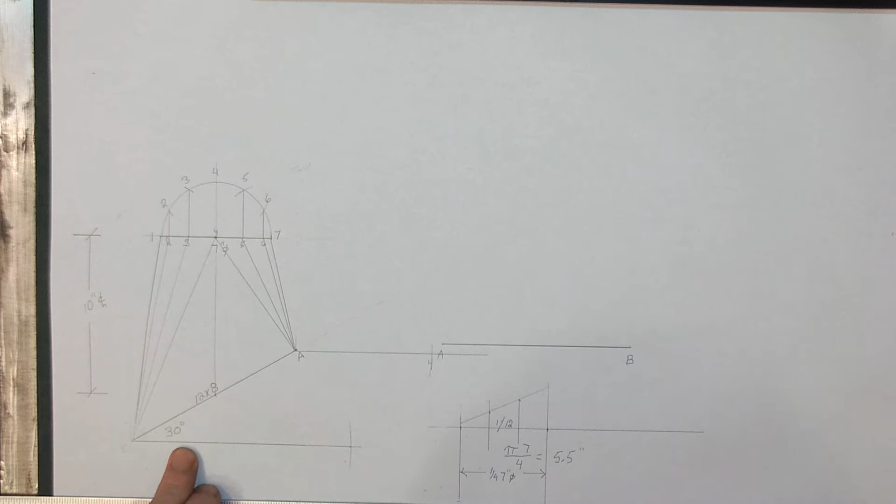Good day. I am the Draft Doctor, and in this lesson I am laying out a pitched square to round. This pitched square to round has a 30-degree angle on it. It's 12 by 8 at the rectangular end and 7-inch round at the top.

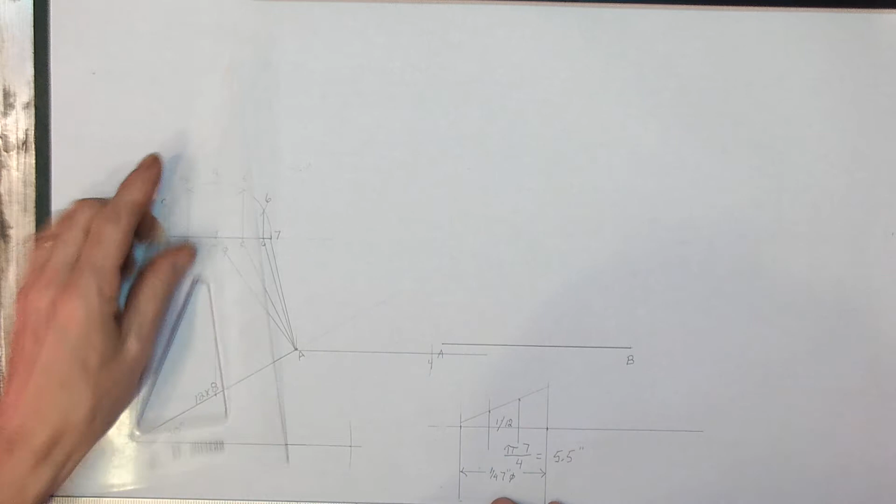Now, I've gone ahead and made my elevation view. I've put my profile on the top. I've divided it into equal spaces and I've numbered them. Now, in order for me to get some lengths that I can triangulate with, what I need to do is project this up into plan view as well. So if I just bring that up like that, and I'm going to bring this corner up like this. This is what we see in the plan view.

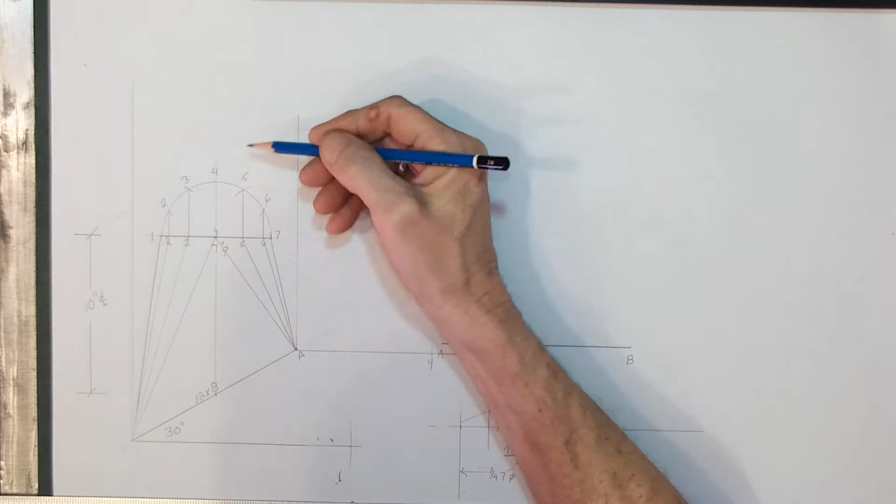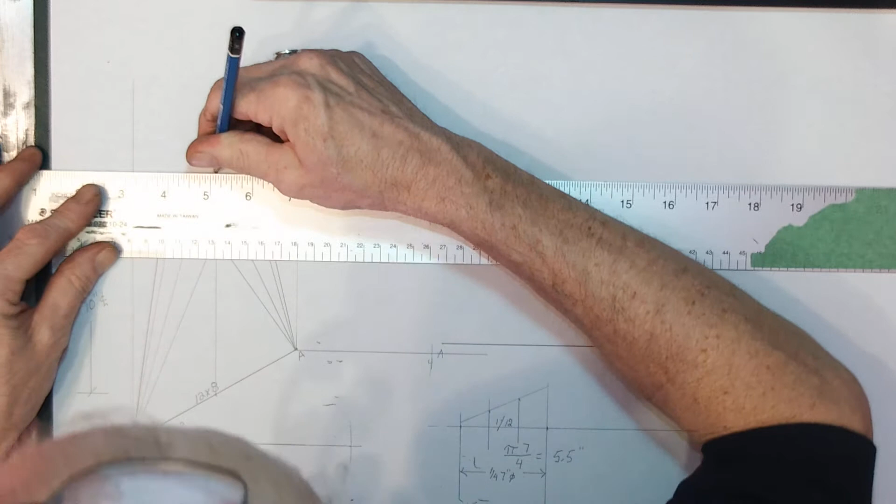I know it's not the same length as the 12, but we're not going to worry about that right now. And if this is 8 inches and this is my center line, then I would have to come up 4 inches to that edge. And I'll have this profile and we'll be using it as part of our plan view. So now on my 3/8 scale, I need to go up 4 inches, and that right there is now a half plan view.

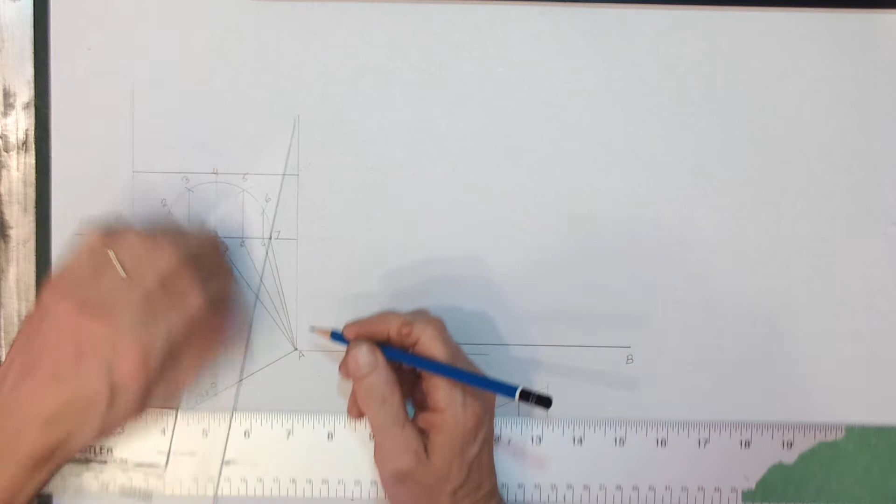This would be my seam. This would be my seam. And let's just mark this in here. Well, I've kind of connected my views together. And there's a reason for all this. Here. Now, if I look at that, there is a half view of my fitting.

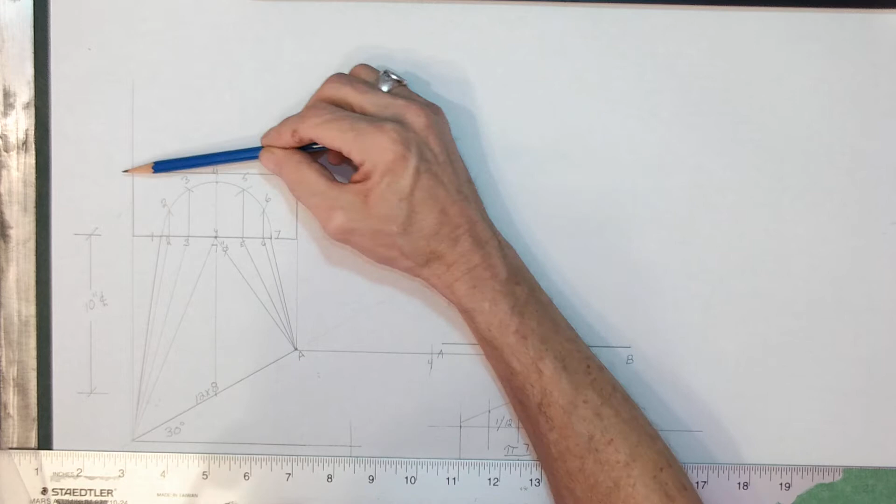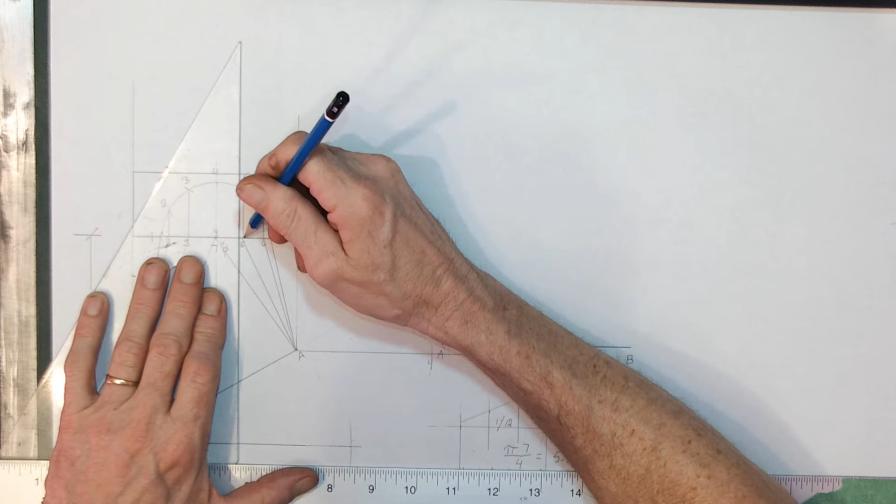Now, in order for me to triangulate these lengths, I have to triangulate over the difference in the falls from center line. Now let's take an example of number 4. 4 is falling from center line half of the diameter, and its relationship to A and B is the fall of the difference right here. So in order for me to triangulate that, here's a little trick that I like to use. What I'm going to do is just extend these up to the edge of my base, my 12-inch side that I'm seeing in the plan view here.

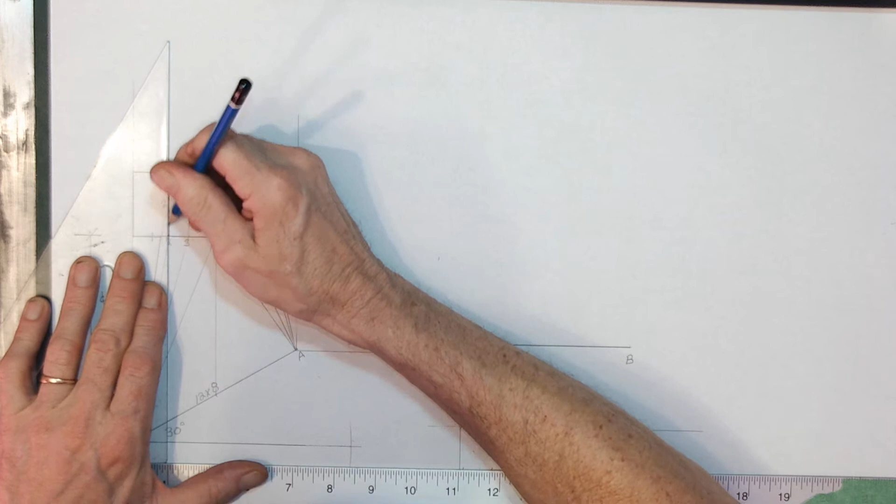And in essence, what this is going to accomplish is it is going to give me 7 true-length triangles with the fall already incorporated into them. When it comes to triangulation, we are always looking for true-length triangles that can be utilized. So I'm just going to extend that now, probably into my pattern, but that's okay. And we're ready to start.

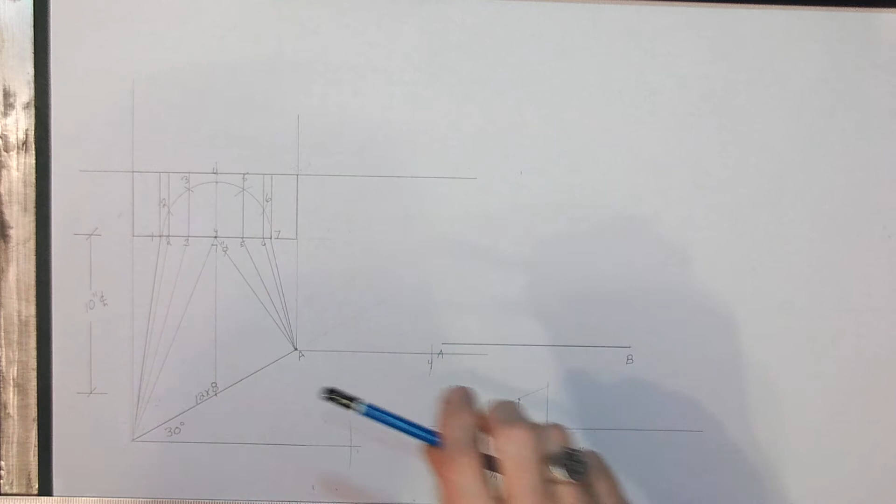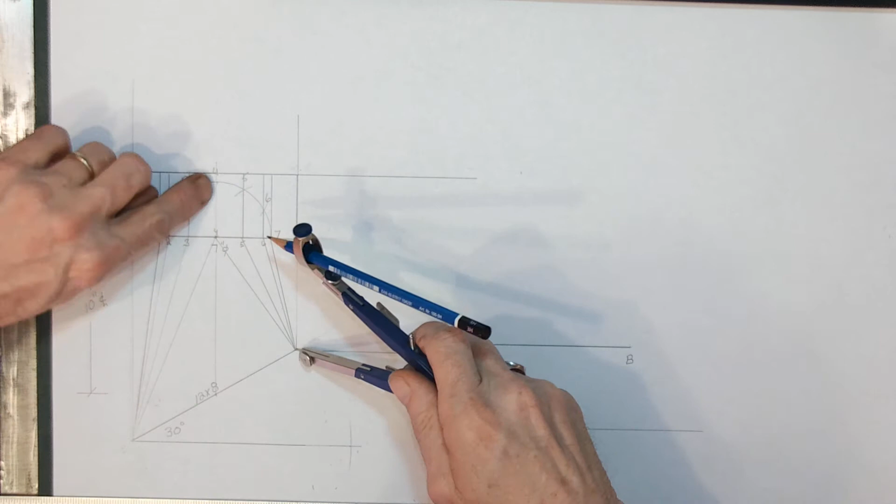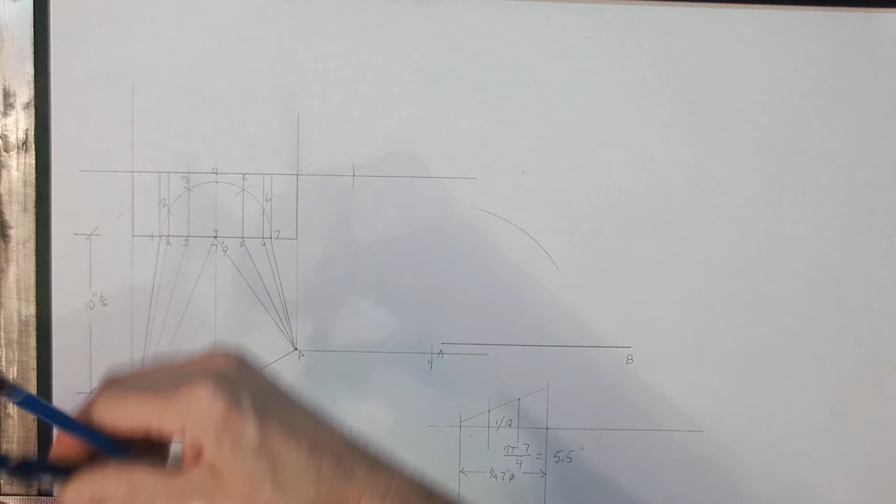I've laid out AB. I flip-flopped them from BA so that I would get a nice inside pattern. Here is the length of my A to 4. Now, if I use the fall of 4 and I take this and mark it from 4, I have a true length triangle for that particular fall. And now I'm just going to take the true length of that, and from A, somewhere on this arc, will be point 4. Where on that arc? Well, we're going to find that out when we triangulate B4.

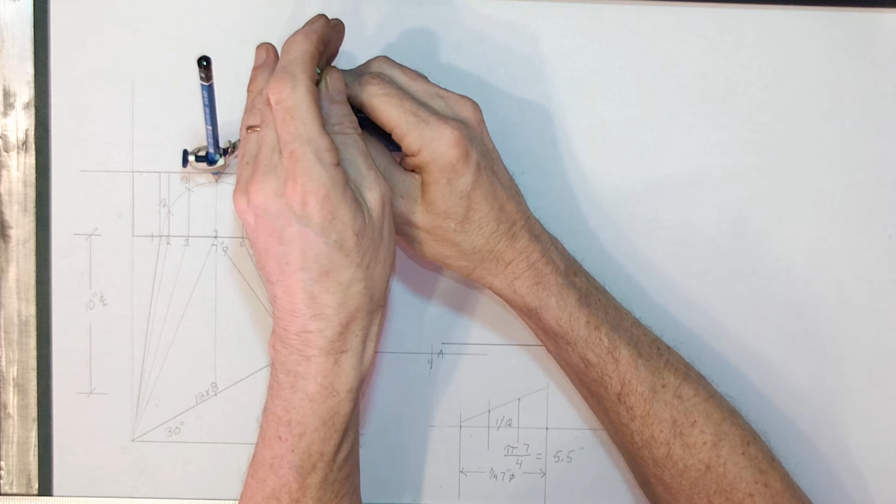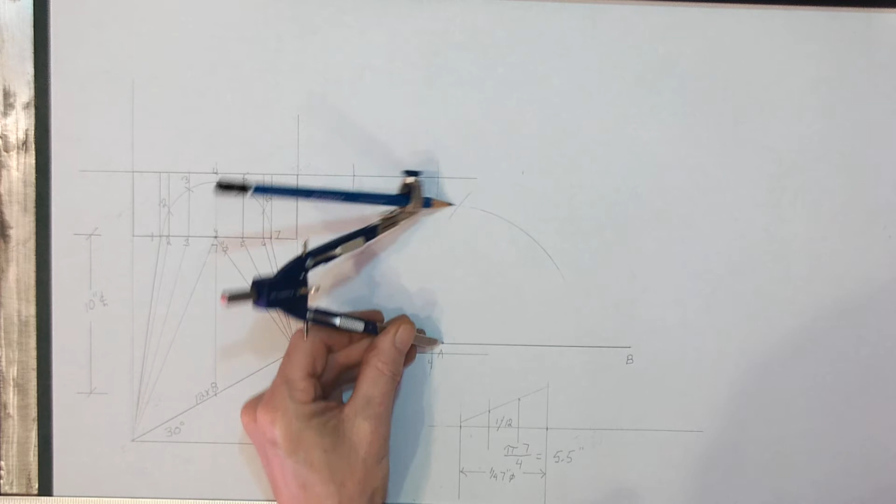There's our plan length of B4. Now I'm using the fall of 4 to the edge. There's my plan length. My true length is the hypotenuse to this point here on the round. And there we have it. And from B, I find point 4. Try to make that first arc kind of big because I never know where it's going to intersect with these kind of fittings. So obviously I didn't get it in the right spot. And now I have. There's my 4 point.

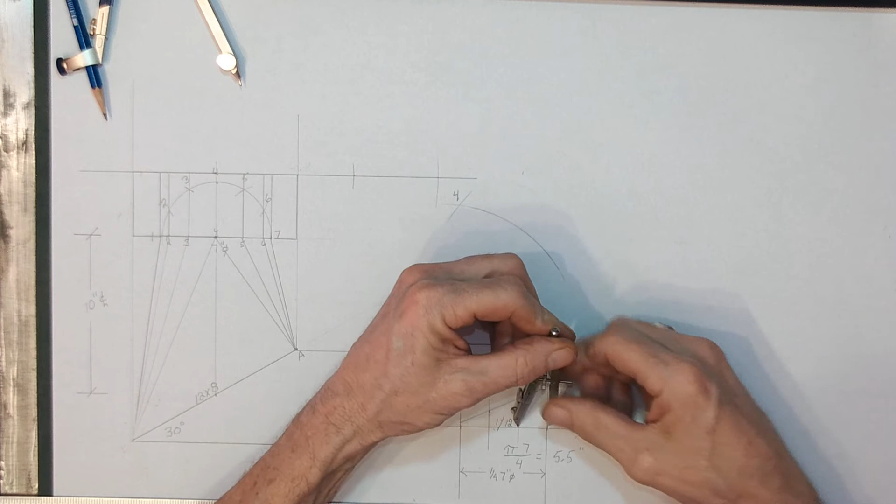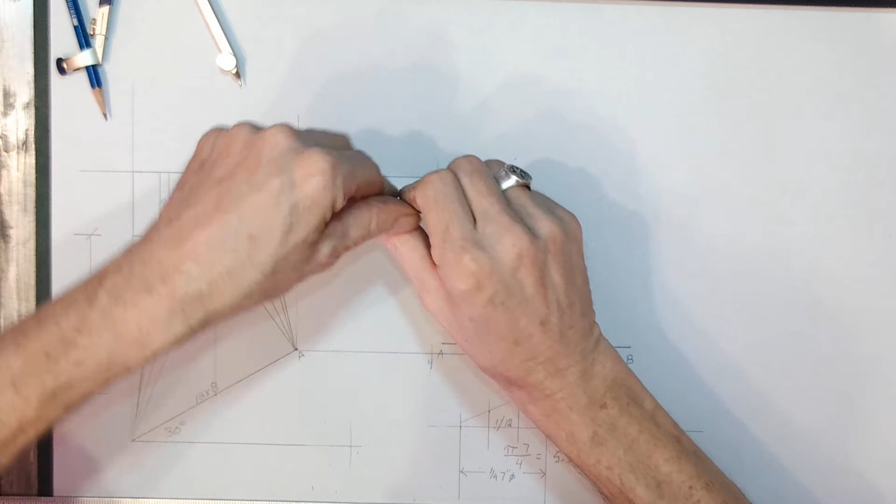From the 4 point, I need to make a relationship to the 3 and the 5, and to do that, I've taken 1/4 of my circumference. I've physically divided it into 3 spaces to get a 1/12 of my circumference, and I set my dividers up for that. And from point 4, somewhere on this arc is point 5. Somewhere on this arc is point 3. Pardon me. Now, let's find point 5 next. Here's our plan length of point 5.

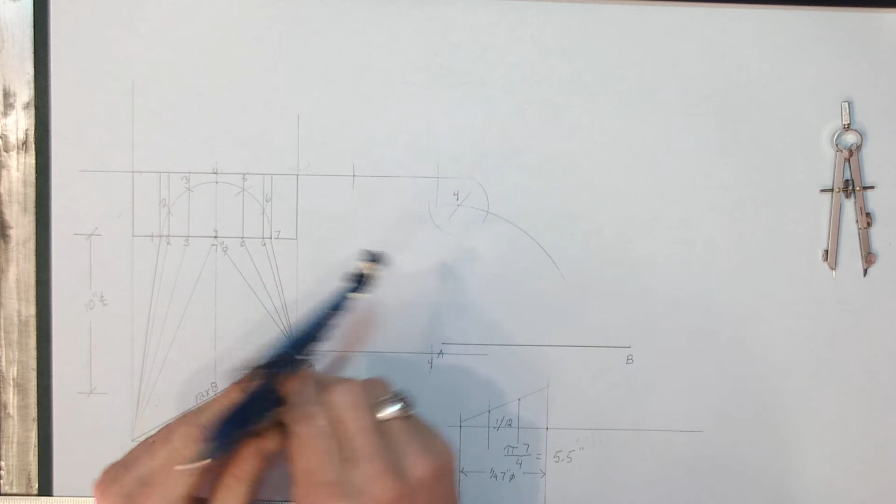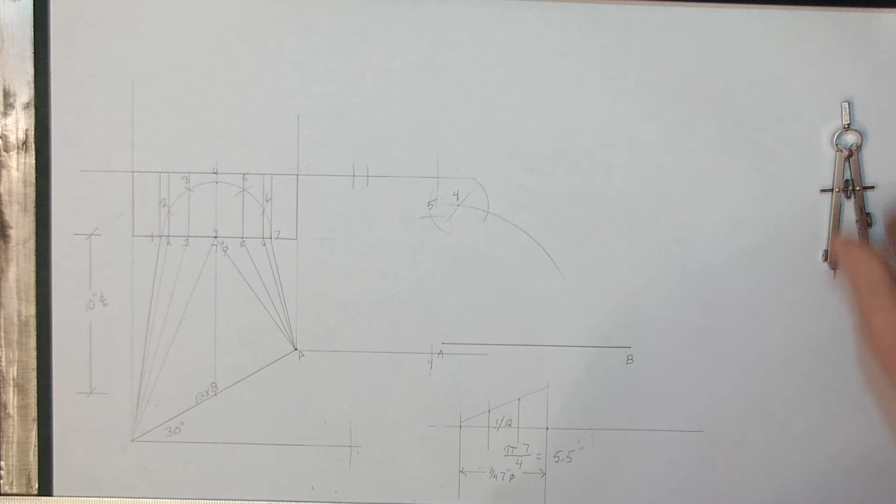Using the 5 triangle that we've created, I'm now going to put down my plan length of 5, or my elevation length of 5. I'm going to triangulate it over the fall, which is ever so slightly bigger, and from A, I get point 5. Let's document 5. Now, using my 1/12 spacing, from point 5, somewhere here on this arc is point 6.

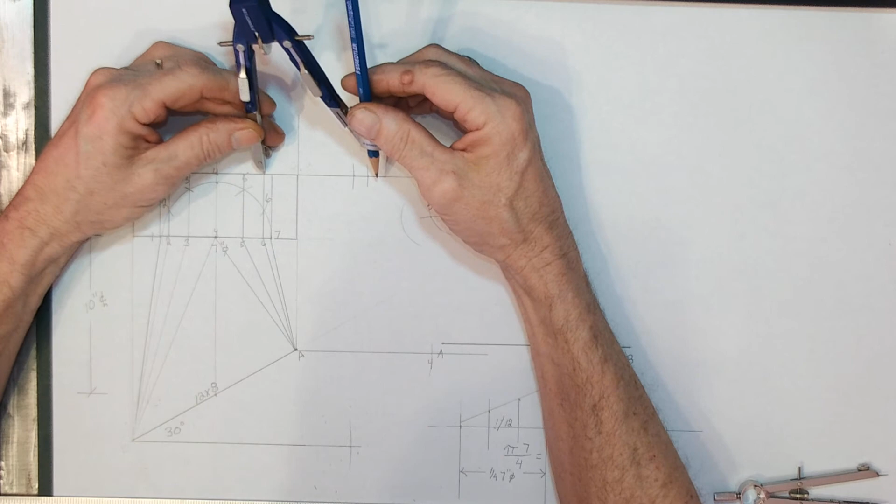We're going to find point 6 by taking our elevation length, using our 6-line true-length triangle, plotting over the hypotenuse of that. The fall's getting a little bigger now, and there's our mark. And from A, I get point 6.

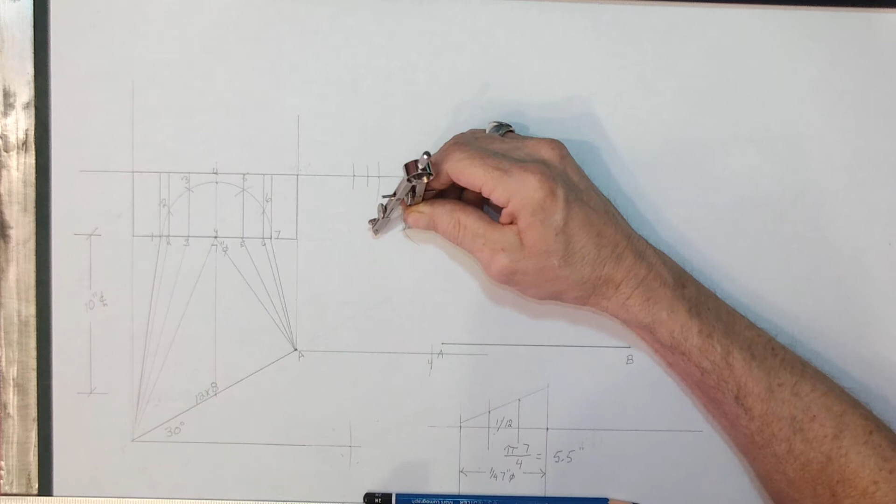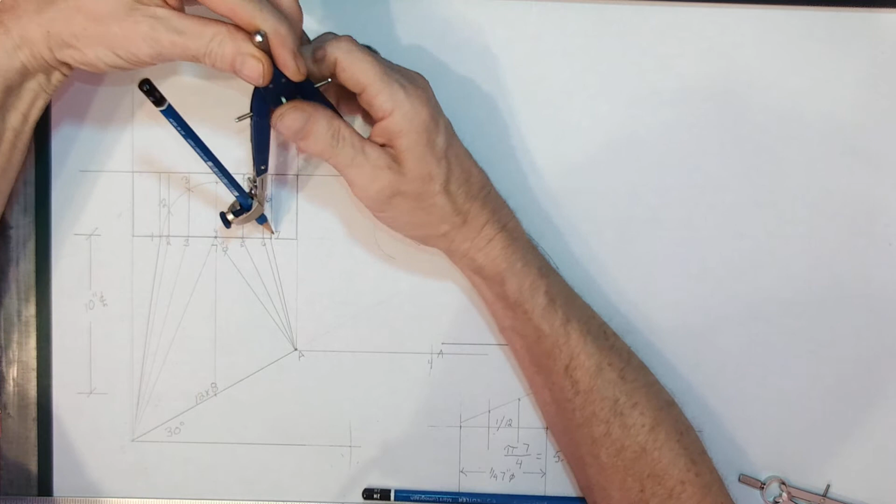From 6 to 7 has this relationship, 1/12 of our stretch out. From A to 7 is this length. Now, since A is on the corner and 7 is on the center, this will be triangulated over the full fall of the fitting, which means all the way to here. And there's the length of my 7 line. I now have my 7.

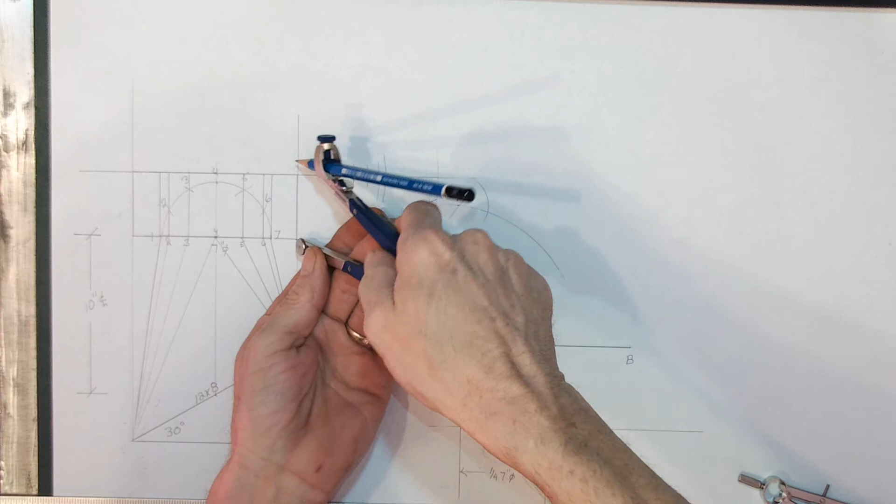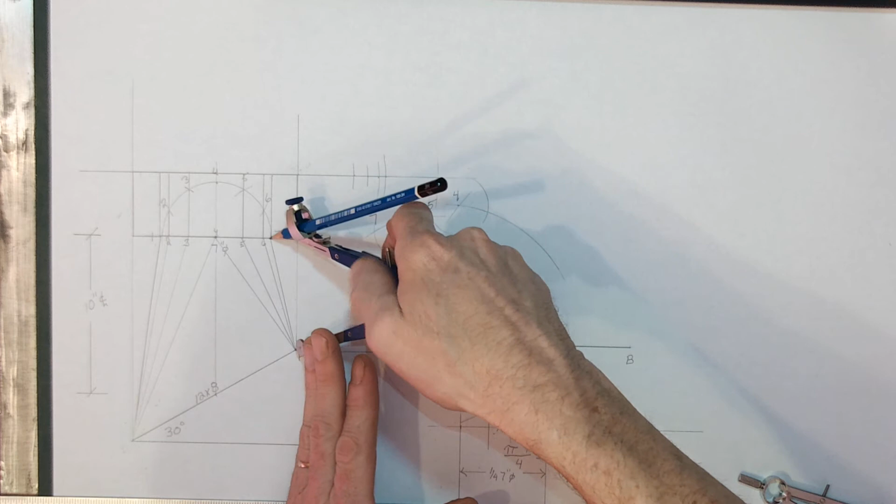From A to my seam is 4 inches, and I've got that marked here in my plan view. So my next step is to try and find that seam, and somewhere on this arc will be that seam. Our seam from S to 7, or from seam to 7, is in the middle, and in fact is also a true length. So now I'm just going to go from 7, come back, and locate my seam. And I can darken that in. We've got half our fitting built.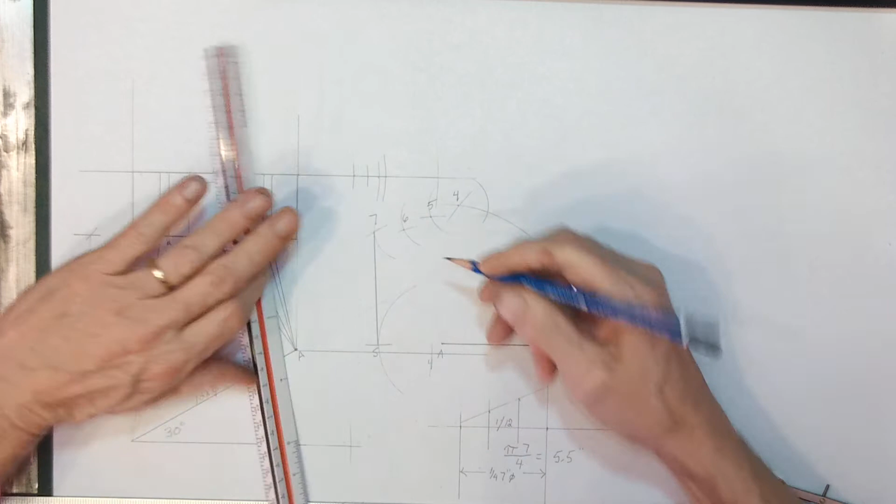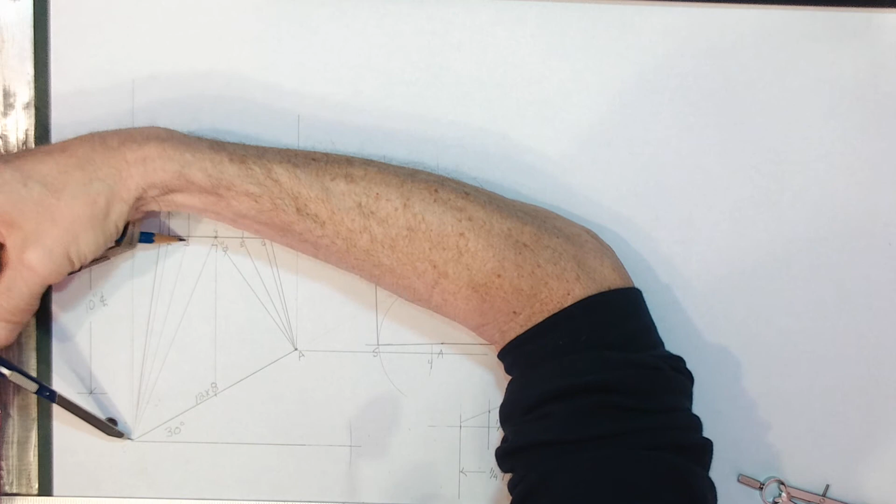Next, from B, I need to find 0.3. From B, 0.3 has an elevation length of that. I'm going to use my number 3 triangle once again now. There's my length off of the elevation. My true length is right there, and from B, I get 0.3.

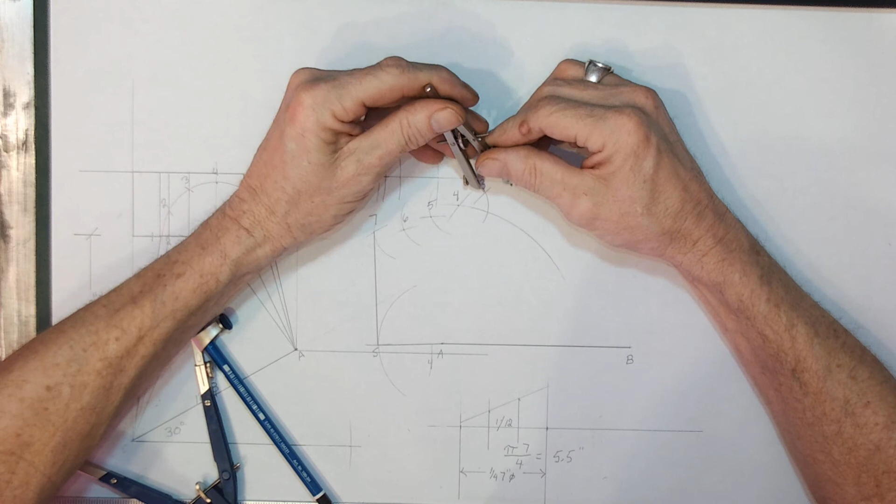From 3 to 2 will be this length right here, somewhere on that arc. We're going to find out by taking our B2 length next. B2 right there, using the 2 triangle. There's my length of B2 right here. And I find my true length by extending it to the mark on the profile. There's the true length of B2. I have 0.2.

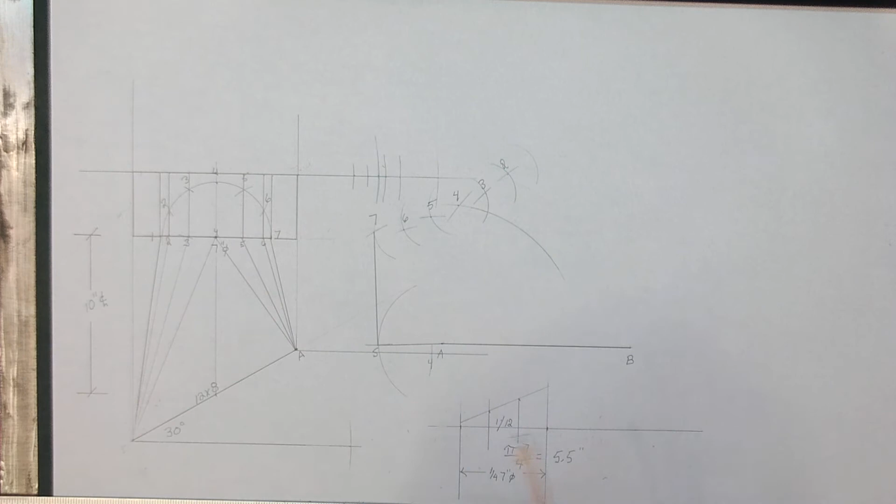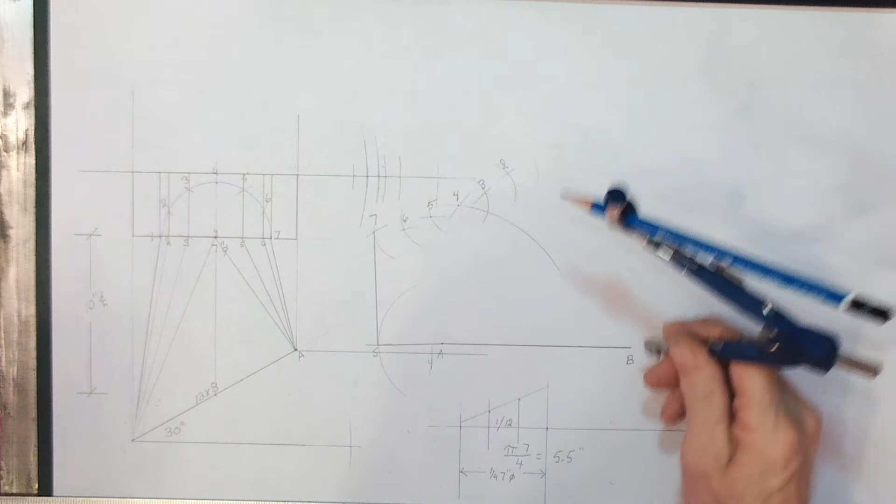From 2 to 0.1, I'm going to find 0.1. I'm now going to take and plot from B to 1. Take it to my true length triangle, since I know that 1 is on center and B is not. And I need to triangulate that over the full fall, which is right here. And there's the true length of B1. And there's 0.1.

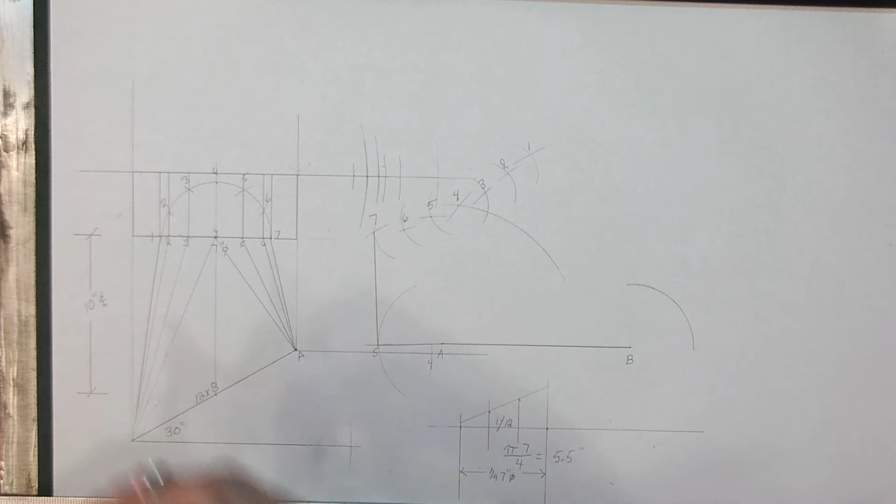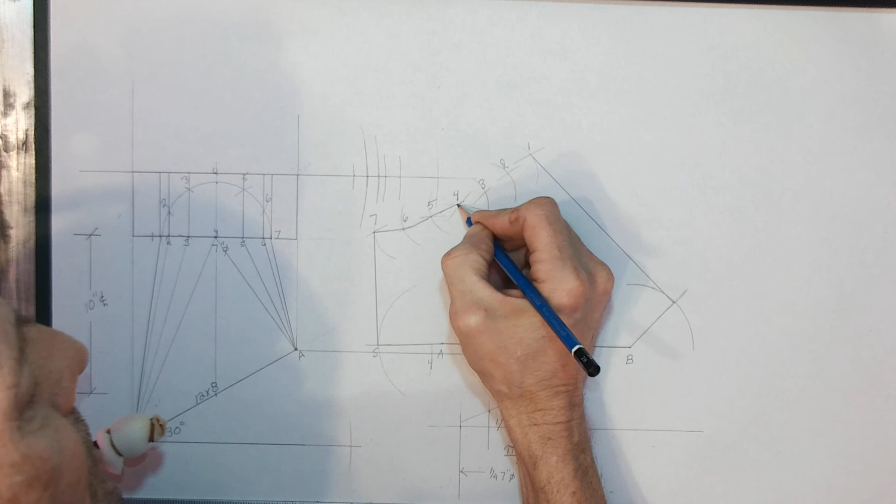Back to our side. We have a 4-inch dimension from B to our seam. So somewhere on this arc will be our seam, and we're going to find out from taking the plan length or the elevation length of B to 1, which is also the true length of 1 to the seam. It is perpendicular to our plane of vision, rendering it in a true length. So now from 1, I will locate my seam here. And we can draw that in. There we have a nice pitched square to round, and that there is my fitting.

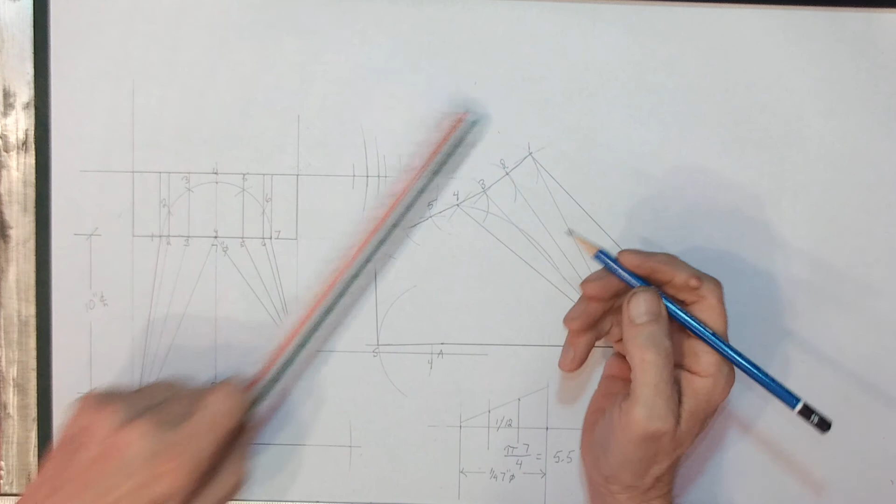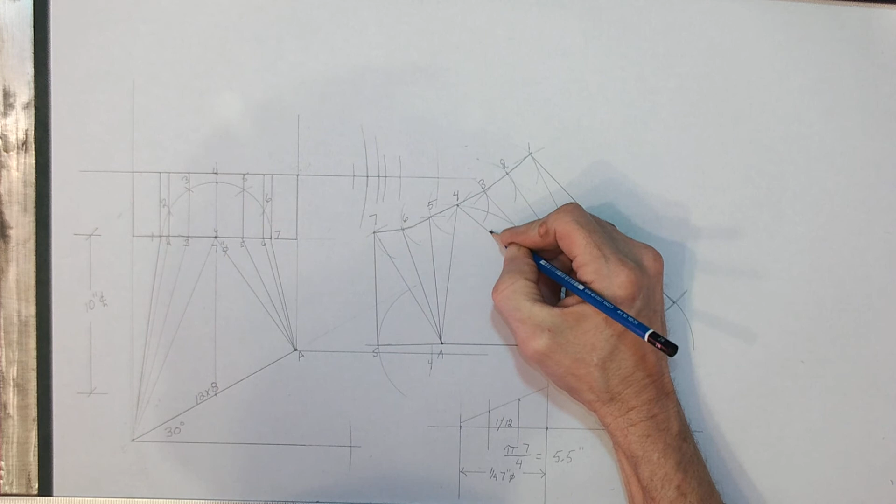Here's how we are going to form it. From B, this will get broke up in a hand brake or in a press brake, depending on the thickness of the material. And that will give us 90 degrees. And then from here, we're going to give these all a break and roll them up 90 degrees. So between this 4 line and this 1 line has to come up 90 degrees. Likewise between the 7 and the 4, 90 degrees. 1 of 2 required.

This fitting is now ready for the allowances or whatever proprietary connections you plan on doing on your fitting, but this is the basic layout. From here, it's simply adding allowances.